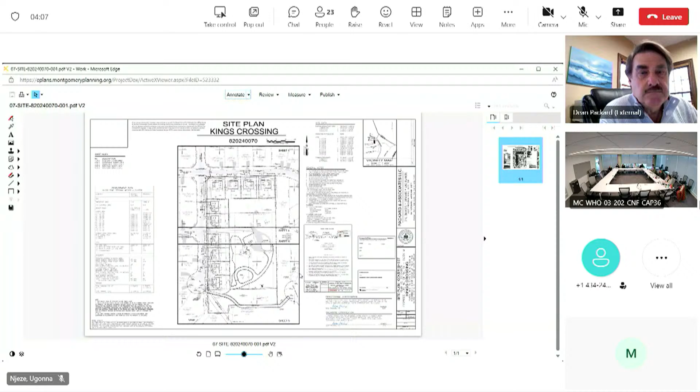So Ugo, if you want to bring up the plan. Morning everybody, my name is Ugo Njeze, I'm the lead reviewer for Kings Crossing. This is a site plan.

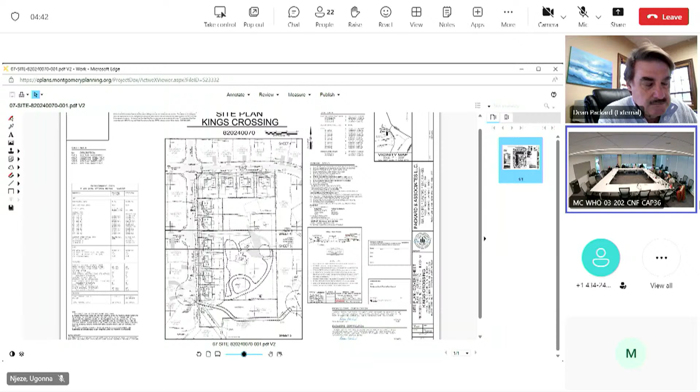There already is an approved preliminary plan for this project. This property is being developed at the R200 optional method development standard. There is a 20% imperviousness cap due to the 1989 Germantown master plan. There will be a Category 1 conservation easement along the rural open space. Between these two cul-de-sacs, there will be a trail developed at the Parks Department standard. This is just north of Kings Crossing Park. The properties around it are zoned PED.

And there will also be reforestation and the removal of 4 trees. So I'm going to start with comments from right-of-way. Well, if you want to highlight any of the major issues, and then we'll turn it over if they have questions.

So one of the first major issues is that there's going to need to be improvements to this intersection here. You need to put in 4 directionals, and that is going to run up against the 20% impervious surface cap. They're already at that limit right there by decimals. So improvements there means that other things will have to be taken away to accommodate for that.

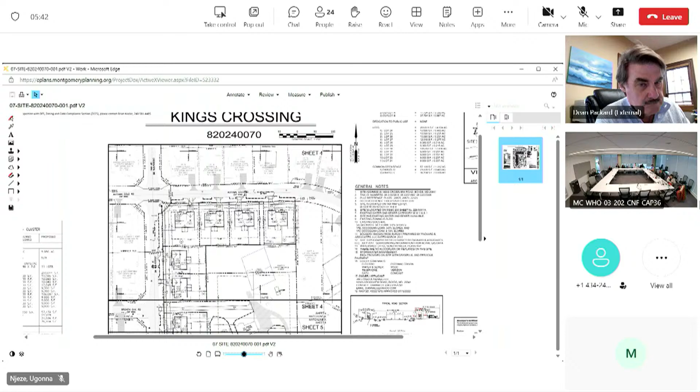Also, Parks has agreed to take over this trail and maintain it, but it's going to have to be to their standards. And we just received the landscape plan, we haven't reviewed it yet, but after the review we can address some of the tree planting details. We also want to work on some of these driveways and push the porches back, push the garage back so the porches are the most prominent part of the homes. Those are our big initial, big ticket comments on this project.

Hey, Dean, okay, regarding the impervious area, if that impervious becomes part of the tract area, even though it's in the right of way, does that still count against the impervious cap, even though it's not part of our property that we have to improve? That is true, yes.

Okay, I have a couple questions. One was for Marie. Her comment about the 50-foot vehicular access to the front door, it's just for one house. So I guess, do we have to show where that comes in, Marie, or can you explain that a little more? I'm not quite sure. So 50 feet to the main side hinge door applies unless you choose to height restrict. If you choose a height restricted unit, you get up to 150 feet. I didn't see that you had identified the height restriction appropriately on the fire department access plan. So if you're willing to go that route, I think that's going to resolve your issue.

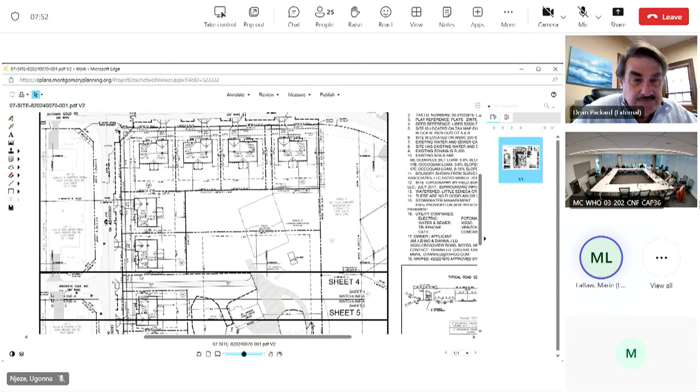Okay, I think the only house that's an issue is the existing house that exists now. I'm sorry, okay, I remember the comment now. So you need to show that your BRLs are all 15 feet, and then it's a non-issue because you don't have a shared driveway. Currently, the fire department access plan you submitted showed your side BRLs at like 5 feet, less than 15. So you have the space. If you increase those to 15-foot BRLs, then you've addressed the comment and it goes away. Okay, all right, thank you.

Absolutely. And is there further definition, because there's a comment about pushing the garages back. Are you thinking of pushing them back 3 feet, or making them flush, or recessing them? What is the logic behind it? I know what the logic is, but what's more specifically being asked? Is Mr. Duke on the line?

Sure, one of the things is that we don't want the garage to be the prominent feature of the facade, rather having a porch or another element be the prominent feature, a covered stoop, the main facade of the building, of each house.

Okay, so it just needs to be addressed and worked out. Right, Dean. That comment also ties in to the comment from Sam Farhadi with DPS right of way. Sam, do you want to elaborate on that comment about the driveways?

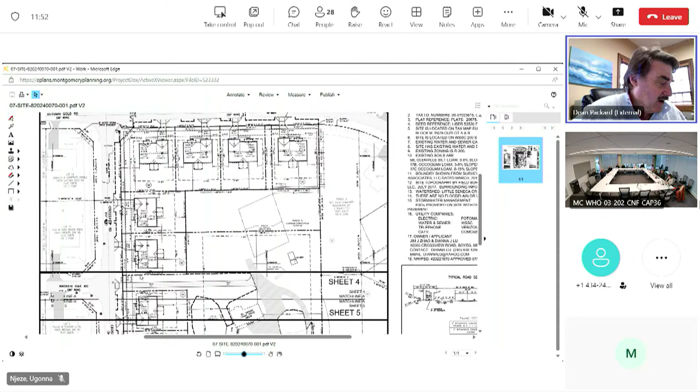Okay, and one other question I have in your comments, I guess change mark RRP-1. It's kind of a long comment about providing public sidewalk. In the last sentence, it says, however, it seems the intention is for it to be maintained by parks. If so, please replace PAE with the appropriate easement accordingly. What does PAE stand for? PAE is what you currently have shown on the plan, Dean. It's called public access easement.

Oh, okay. Public access easement essentially turns it over for maintenance to the county. And if you want to meet county standards, they're a lot more rigorous and strict, and in our preliminary discussion, parks is willing to take over the maintenance. Accordingly, you need to change the easements that parks finds appropriate, and the cross sections and standards need to meet their standards as well.

Okay, and we're not proposing to do any changes to the swales other than putting the driveway culverts in, so we'll have to justify that going forward. Yeah, I mean, since it's open section roadways, swales need to meet our standards: freeboard, slope, velocity, and everything per our manual needs to be checked to make sure they're all compliant.

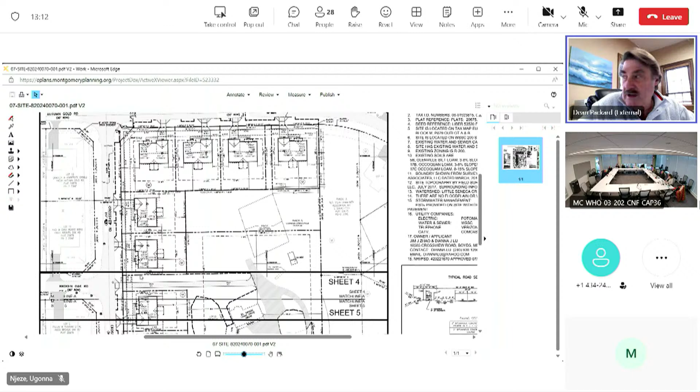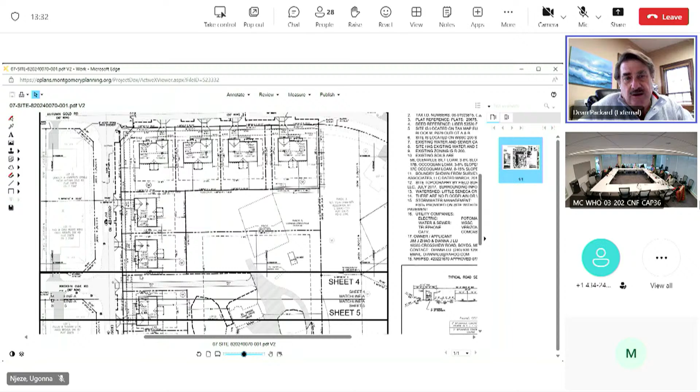Okay, the next discussion, I know we've been going back and forth with WSSC on this. When we first submitted the plan for lot 28 in regard to WSSC, we had a sewer connection between lots 26 and 27 connecting to Autumn Gold Road. We got a comment at one point in time to connect to Crossview Road.

And more recently, the discussions between the applicant and WSSC have been—my understanding is that they would prefer not to extend the sewer in Crossview Road, and they would prefer to have the connection between lots 26 and 27 to avoid additional sewer to be maintained. I don't know where that's going, but if somebody can address that.

This is Matt Snyder with WSSC. So we have no issues with the sewer being extended in Crossview Road. If the applicant wants to apply for a non-abutting connection and use the existing manhole, our concern is maintaining the pipeline design manual setback from the two lots on either side. I can't tell you what lots those are if it was coming from Autumn Gold Road.

So that would be an option, but we need to make sure that the excavation for that sewer in the future for maintenance won't undermine the slabs of those two houses. So it can possibly come in between those two lots, but we also have no issues with the sewer line being extended north up Crossview Road to serve the house and the other lot.

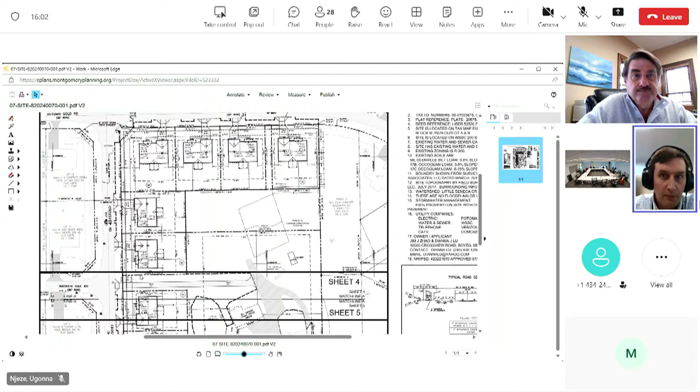So as long as it's not an issue for anybody else, because I guess it would be a private easement, dedicated to WSSC for maintenance. So that would be for private maintenance, for lot 28's maintenance purposes. WSSC's connection will end at the right-of-way line. I'm sorry, I stand corrected.

This is Rebecca from DOT. We had that issue that was brought to our attention regarding WSSC and the water meters, and we haven't heard back from them. WSSC was supposed to provide some information last time we met, and we haven't made any further progress on that.

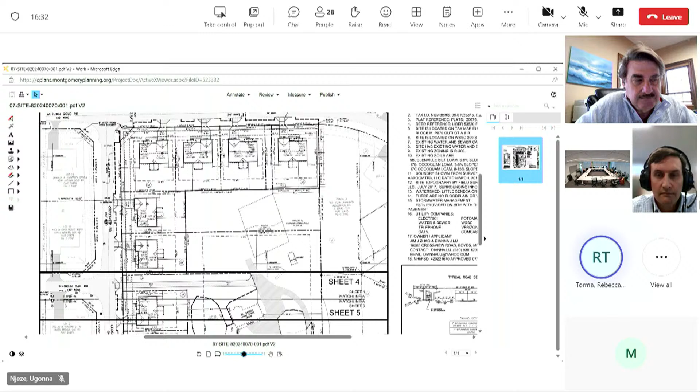This is Karen Carpio, Rebecca. I will talk with Ray Chica, our division manager, about it, and I will give you an update. Not today, tomorrow. I just wanted to bring it, and I want to bring it to Dean's attention. No, absolutely, thank you.

So per the applicant's request, if we were to revise the plan to show the sewer connection between lots 26 and 27 to support the WSSC requirements, would there be any objection to that? I don't think so. We'll have to look at it a little bit more. We can coordinate afterwards.

I know the applicant's on the phone and they were very interested in hearing the discussion on this, so I just want to make sure it was brought up. Well, they're more than welcome to join any conversation we have after the fact.

As far as the open space, I would imagine the open space exhibit would be a part of the landscape plan. And as far as benches and access, I know the logic would be to have benches along the park trail, that would work. How does that necessarily apply to the open space area in, I guess it's parcel E, because we just have that kind of as an open area?

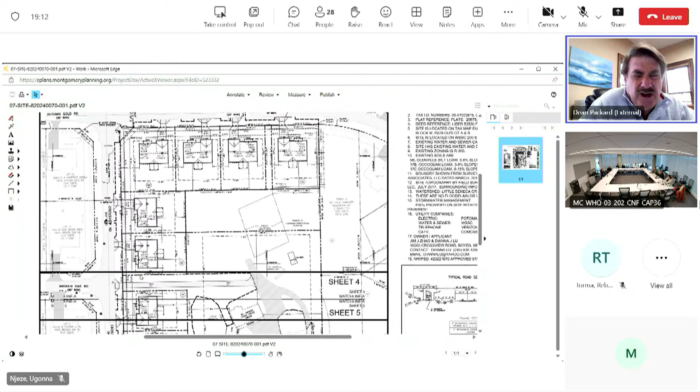And we need to do the, if the park is going to take over the trail, from what I understand, they would take over the trail even across parcel E from one road to the other, and it would have to be built to their standards. That's my understanding.

This is Henry Coppola from Parks. So yes, Parks can take on maintenance of the paved trail as long as it's built to all of our standards, and as Scott alluded to before, with the proper easements for it, we're going to need a separate easement document directly to Parks for access and maintenance, and it'll need to cover all of the area of the trail that's not on parkland.

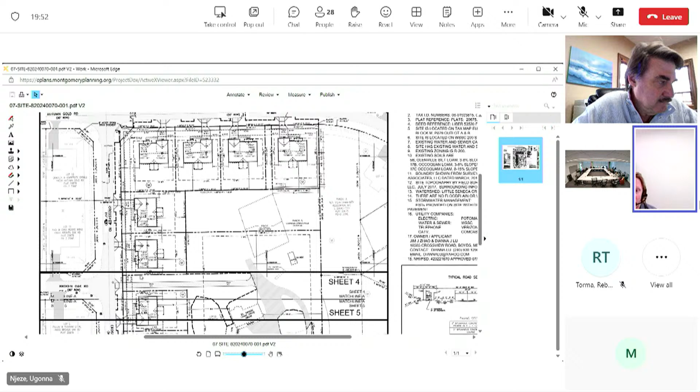So that's across the new proposed HOA parcel from this project, but it also crosses an existing HOA parcel on the plans to reach the cul-de-sac on Crossview. And for Parks to maintain that piece, we'd also need to have an easement providing access for the maintenance and use of the trail across there.

Just FYI, the easement will probably have to be a little bit wider than the actual 11 feet of the path, just a slightly different bit to cover and show on there, because if you've got to do work on it, it's not just directly on the surface. But those are details we can figure out, and we can provide some examples of the kind of easement language we're thinking about.

11 foot is the minimum width, and I know there were some questions from the applicant and the community as to potentially putting bollards in, since they were worried that cars would be driving on it. Yeah, I think we have standards for bollards, and we can certainly look at whether or not that seems appropriate here. If there's concerns, then it's probably reasonable to take a good look at including them.

And there was one last question about extending the sidewalk.

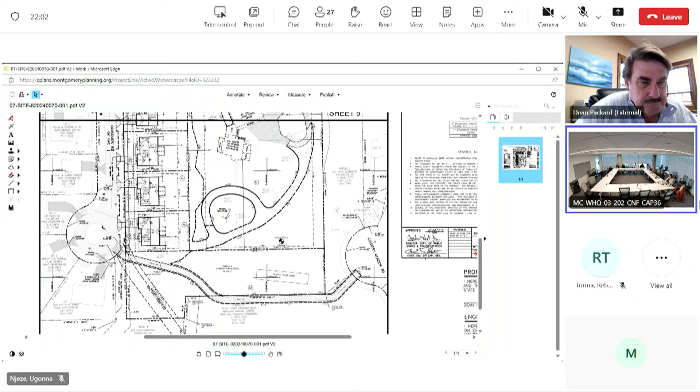Yeah, that's a similar comment as well. Get to this thing, so connect that sidewalk to the one we're proposing. Exactly, yes. Okay, and there may have been a reason why that wasn't done before, but I'll look at that. We can talk about it later.

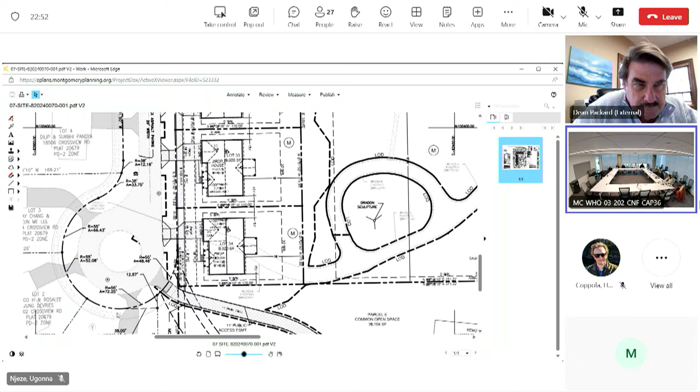I have one more comment as well, Dean. The trail that you're extending on Parks property, when it connects to the street on the cul-de-sac, I'm not sure what's the name of it, is it Cross Country? On the right-hand side, please show the sidewalk and show the connection is made to the sidewalk. Right. Okay. All right, we can do that.

I did have one question for Doug Johnson on the forest conservation plan. I'm here, Dean. I understand the new code, but I was trying to understand how the two worksheets really came into play with this property, since we were doing all the forest conservation on site, because it says something about a worksheet for on site and off site.

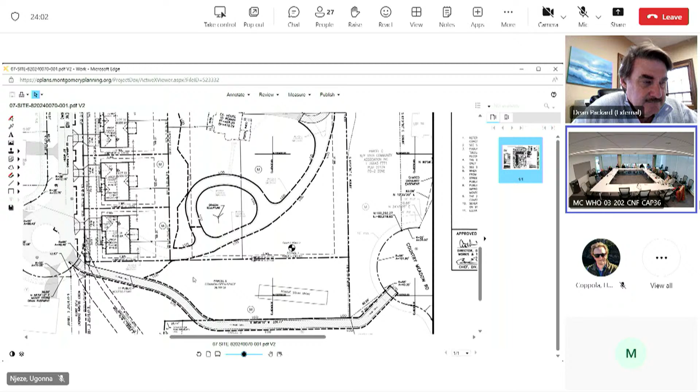Yeah, that was set up under the new law where the requirements are different. If you notice offsite, generally the requirements will increase if you're going outside the watershed or outside of a priority area. Our attorneys want both sheets on the FCP, so they made that a requirement for us. So that's how it got shifted over to you.

Okay, all right. Also, we're talking about all these pushing the homes back, lengthening the driveways, doing offsite improvements. I just want to reiterate that there is a 20% impervious cap on this property, so you may have to get a little creative not to go over that.

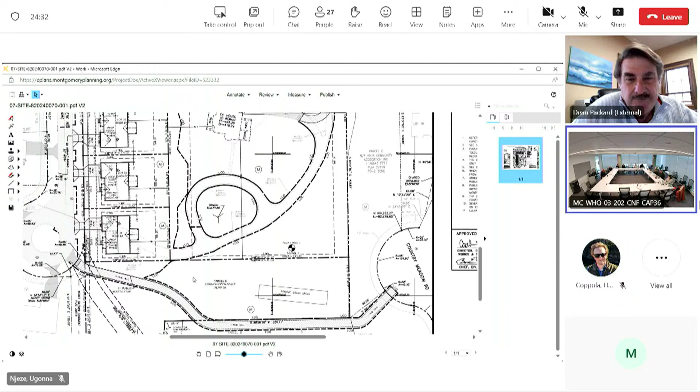I understand. And Doug, just before you walked in, the question came up on whether the off-site impervious areas counted against the imperviousness of the project. Yes, and the answer is yes. Any offsite work an applicant is required to do gets counted into the net tract area, the FCP, but also if it's impervious in an impervious capped area, then it's counted against the project as well.

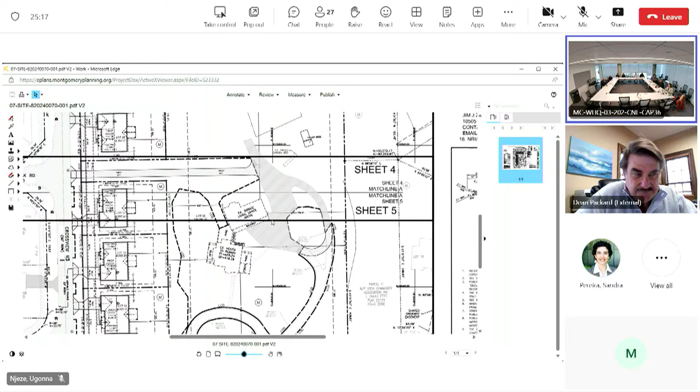Okay, we'll juggle and balance. I think that's all that I have. Thank you, everybody. All right, thank you.

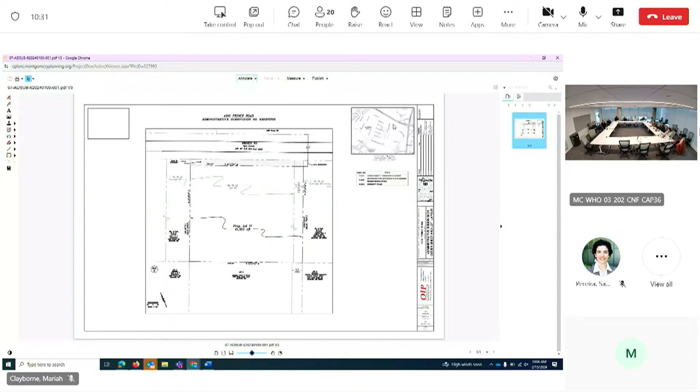So this property, as Christina stated, is located at 4310 Prince Road for an administrative subdivision plan. The owner proposes to take part 14 and part 15 of the lot to create lot 17, equivalent to 41,360 square feet. They will be adding a single family residence to the site, but also keeping the existing pool on the property as well.

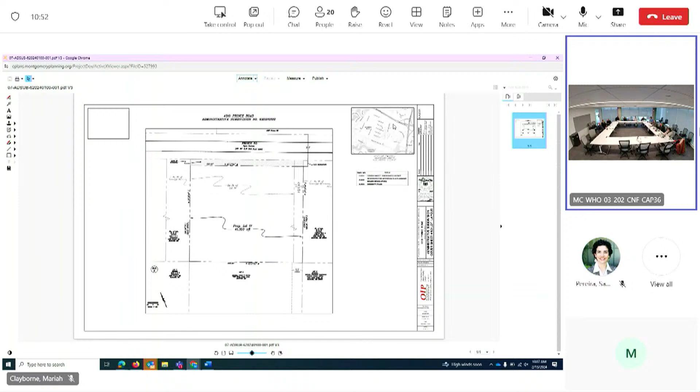The main concerns for this site, as previously, the applicant did meet with staff before to go over a concept plan for this proposal. And the major concerns were definitely to provide history of the past lot lines, because things were just a little unclear. That still hasn't been provided yet. So that definitely is one of the major concerns, to provide past history of the lot lines and the deeds for this property and location.

I can go. Let me show the plan just so you can see.

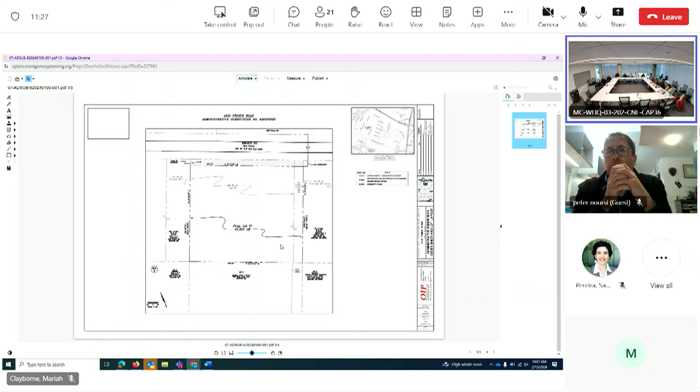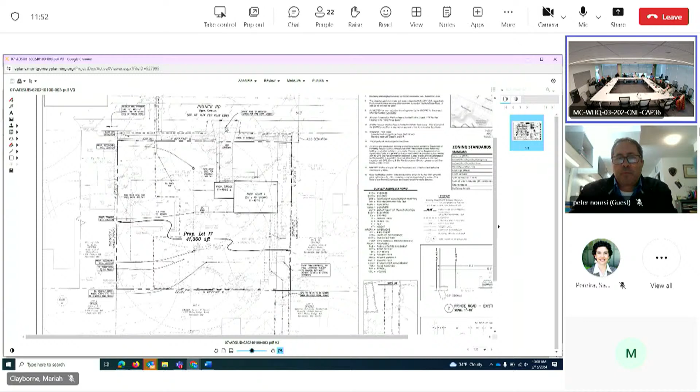Zoom out a little bit. So of course, this is the house that's proposed. There's a driveway that is proposed as well. I do know that our design staff has comments for this as well, but I'll go ahead and kick it over to the applicant for any questions that you may have with the comments that were provided.

Peter, I assume you're going to take the lead on this? You're muted. I got that. Thank you, Mariah, and thanks for the opportunity to present this plan to you all. Lance, can you turn it down?

We went through the comments and we're comfortable with most of the comments. We do have a proposed change that we would like to present to you for your consideration and hopefully acceptance. But just some background on this, or not background, but some of the comments.

There were quite a few comments which questioned the fire and rescue requirements for the driveway. We confirmed with Marie LeBeau that that's the driveway that's required in order for the fire department turnaround at this site, because to the right of the plan there's two more lots and there's a dead end without a turnaround that's acceptable to fire and rescue. So that's what's necessitated the driveway configuration.

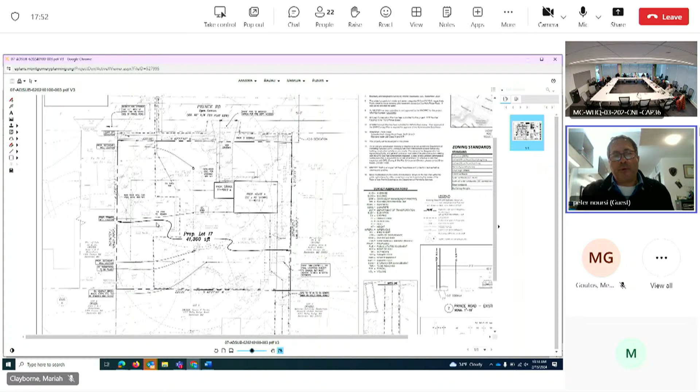Those were our main items that we wanted to flag. We didn't have any significant issues with any of the comments. The only one that came up was when Mariah's comment that, before we go to record plat, we would have to remove any structures that contradict or conflict with the setbacks. So we have no problem with the existing shed that's in the front setback, but the swimming pool would also be in that, and again, we want to save that swimming pool in its current layout.

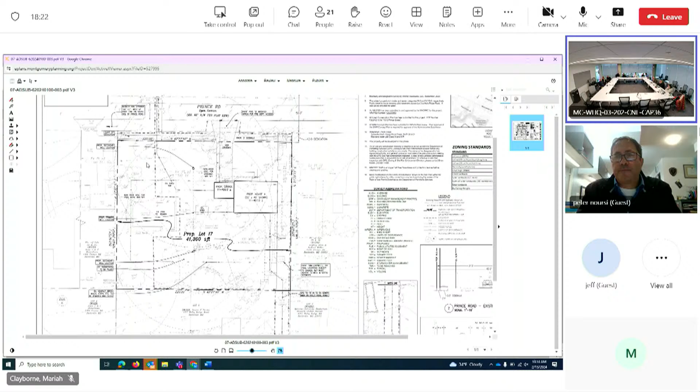Okay, so we'll have to look at that during your resubmittal to review. Okay, so our general policy is where dedication is possible, to get dedication. Given the circumstances, we'll consider an option for an easement instead, but at this point we can't say yes or no. We need to discuss it further.

Okay, yeah, I mean it's an existing swimming pool that has been in that neighborhood for decades, so again we would like to save that if possible. Understood, so are you seeking a variance from that setback, or what are you requesting? We're requesting that instead of providing dedication, it be made into an easement that would serve the same purposes, but being an easement, the setback would be to the existing property line, which is 12 feet.

Which gives us 12 feet for the setback. And the edge of the swimming pool right now that protrudes towards the street is at 78 feet from the proposed property line. It is 90 feet from the existing property line, and the whole neighborhood has that existing property line. So Peter, can you address the neighbors? The neighbors do not have the dedication, is that correct?

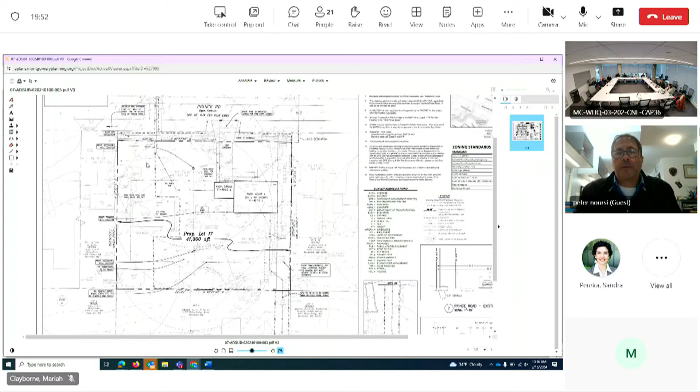Correct. The whole neighborhood, when the subdivision was made, all the streets there had a right of way of 50 feet. However, as we're required to go to subdivision for this situation, typically we have to meet the current standards for the road cross section.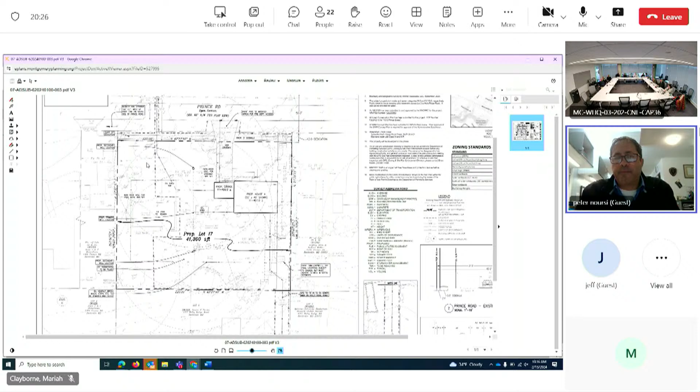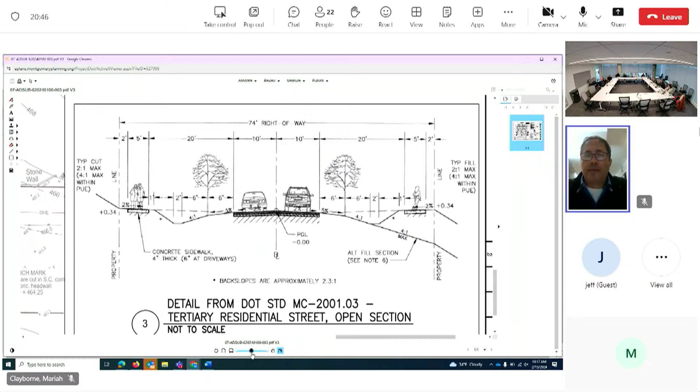And the one we're proposing, Mariah, can you show the cross section we're proposing? It's on the bottom right of the sheet. It's the 2001 Montgomery County DOT standard 2001.03, with a width of 74 feet. So from the center line it's 37 feet, and the existing right-of-way width from the center line is 25 feet. That's where you get the extra 12 feet.

We initially, the plan we're looking at, we're going to do dedication. We hadn't considered the pool setback that we want to keep. So that's why we were going to resubmit the plan with all the comments addressed as best we can, but with this one change where we will request that dedication be made as an easement and not as outright dedication.

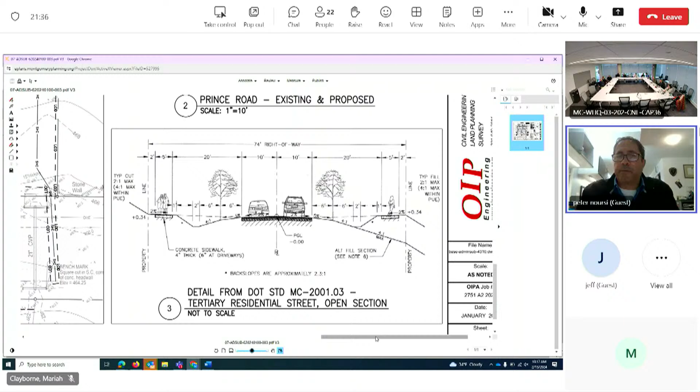And the setback you're referring to is the 80-foot accessory structure setback? Correct, that's how we interpreted the swimming pool. So really we're not talking about 12 feet, we're talking about 2 feet. Correct, it's 2 feet. It's right now, I think 78.1 feet was the setback, right around 78 feet, plus or minus.

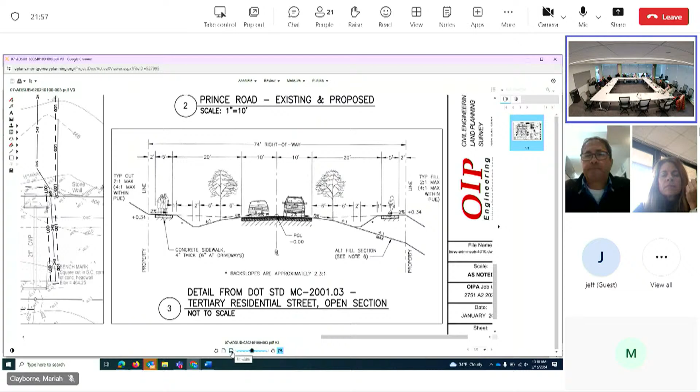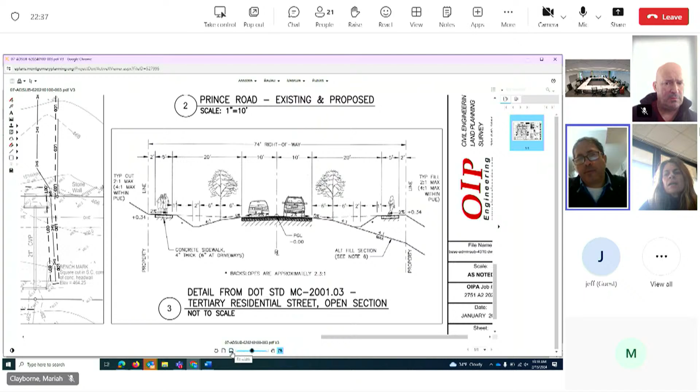So are you asking us, and DOT for that matter, to allow an easement for all 12 feet or just the 10 feet that would not affect the setbacks of the pool? Either way works for us. I was thinking it would all be an easement just for simplicity, to make it one item, but we'd be open to considering breaking that up to 10 feet as opposed to 12 feet, as long as we meet that setback requirement for the swimming pool.

So a couple of things. The cross section that you show is no longer valid. We don't do tertiary streets, it's based on complete streets, and complete streets does not discuss open section. So you'll have to create your own cross section and show us without the tertiary roadway. From the edge of pavement is where you would use the cross section, and we need to make sure it fits within.

So you're showing a right of way, and this is what you're proposing, 50 feet of right of way. And so you're saying that dedication area, you're not dedicating anymore? That's what we were requesting, that change in order for the swimming pool to meet the setback requirements. Because right now, if we did give the full 12 feet dedication, that bump out part of the swimming pool would no longer meet that 80 feet setback requirement for accessory structures.

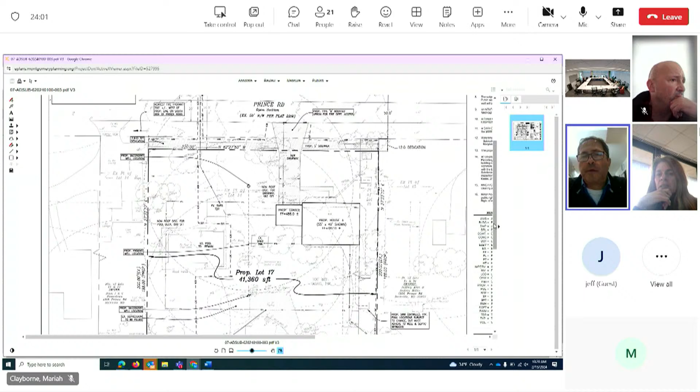So why can't they just get a waiver for the setback, since it's an existing thing they have to dedicate? I mean, we're trying to do the most straightforward approach. Right, I understand that, but we have to get... Can DPS comment on that? Maybe if somebody's on the call from DPS, can they comment on that waiver option?

Well, I think this is a question we should circle back on, because I would like to explore the possibility of a variance. I hear everything staff's saying, Peter, is we very much want the dedication. I hear what you're saying. So let's table this as a question we need to circle back with. I think we need to coordinate with DPS, some zoning exploration as well, to see what the best avenue forward is, so maybe we both get what we want.

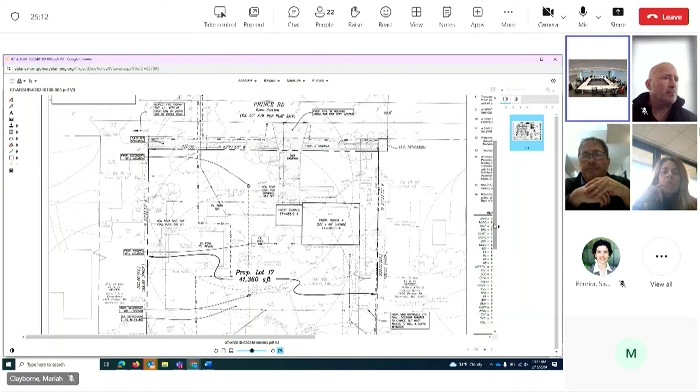Yeah, the idea for us is to address it right now in the administrative subdivision and when we do the record plat, so we don't have to go back after that's done and request a variance, which would be time consuming and costly for our client. Well, I don't want to promise we won't do that, but if we can fold it into this approval and process somehow, let's circle back on this. I understand what you're saying. Yeah, and then I guess I had a question on complete streets.

So, yeah, that was a comment that came up about that cross section, the 2001.03, the DOT cross section. Yeah, this is Billy Whalen. That was my comment, and I emailed you.

Yep, that's an old standard, so we want that reference to that standard removed, and then you'll have to fit that open section cross section with the dimensions with the sidewalk. It would be similar to what you show now, but with changing the sidewalk from 5 feet to 6 feet, it shrinks — there's a 20-foot section between the pavement and the sidewalk, so you would have to adjust that so the ditch still fits within that space shown on the cross section. But we don't want any reference to the old standard cross section.

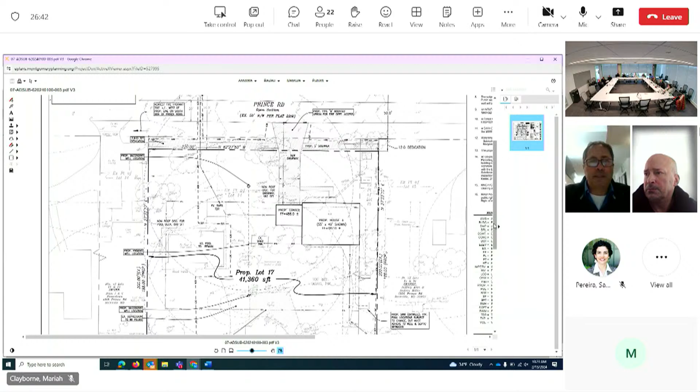Okay, yeah, I'm sorry, earlier I was searching for complete streets — I had a senior moment with that term — but we looked through the updated guidelines on it, and we didn't notice that there was a fixed cross section, which I guess you're saying, I'm hearing again on that.

The one thing I heard, though, Billy, you just said you want 20 feet from edge of pavement to the sidewalk. No — the cross section shown has a 20-foot segment between the edge of pavement and the sidewalk, but bumping the sidewalk up to 6 feet reduces that 20 feet to 19 feet. So you would have to adjust the dimensions within that 20 feet. If you go to the cross section, I can show where.

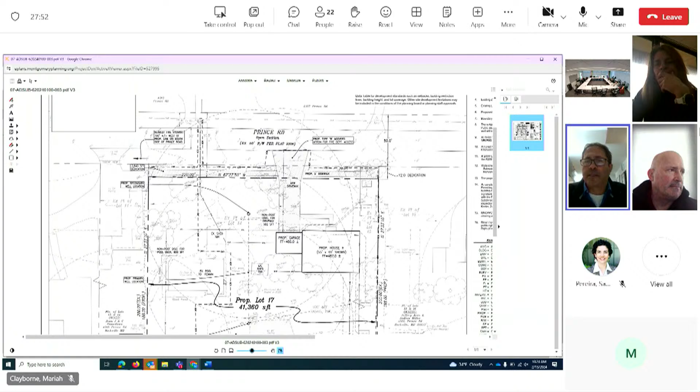Yeah, I mean, if we're going to create our own cross section, can we make it a 70-foot right of way that would satisfy the other requirement or constraint we're dealing with, or does it still have to be a 74-foot right of way? Anything reducing the right of way needs a written justification for why you're doing it, and then we need to approve it.

So my only thought on that is the right-of-way width of 74 feet is based on that DOT standard, which no longer — no, but see, we have complete streets. Complete streets, unfortunately, doesn't really address open section roadways. So the right-of-way, the pavement section, and the stuff between curbs is fine, and then you use the old tertiary standards or some kind of standard.

Was this a tertiary roadway before? It is secondary residential — it's a secondary roadway standard. So you're going to use secondary roadway open section, and use that as your starting point for the behind-the-curb part, from the edge of pavement. And then any reduction from that, you will need to get a waiver from DOT.

Can I ask — again, one of the things I mentioned in my opening remarks is if you were to go to Google Street View and look at the streets in that whole subdivision, they're all consistent, it's 20 foot of asphalt, there are no sidewalks. Doesn't mean we won't put in a sidewalk, but can we try our best to match what's out there, or is that not possible?

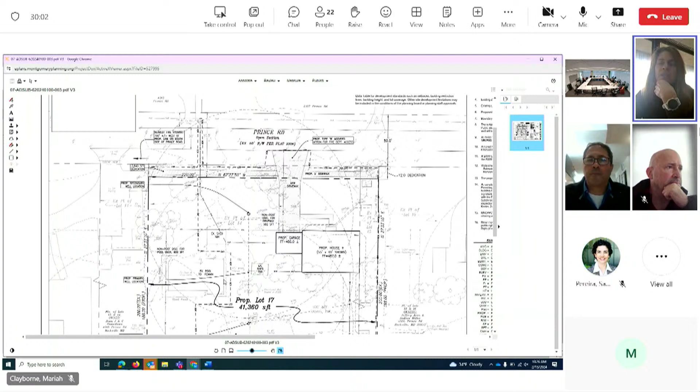Okay, we'll try to get some of that to you hopefully later on this week. Yeah, then we need to talk to DPS, I guess, about their setback.

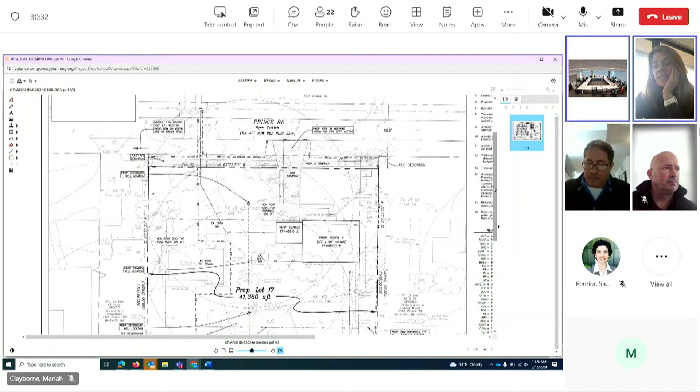And Rebecca, I'm just trying to make sure not to throw a wrench in here — you're talking about the cross sections and how they work, like the right-of-way width being the planning board's decision, I'm making sure that... Yeah, no, so we do cross sections — we do whatever right of way you give us, and then we try to fit the cross section in. I mean, the swale has to be in the right of way. Yeah, so I'm just doing a small clarification, just making sure we're saying the same thing.

So if we do a profile that generally meets the existing profile along the whole street and fit a 6-foot sidewalk in that, is that kind of workable? We have a lot of infill developments that come in, and at a minimum we request the right-of-way. So while we might not get the sidewalk, we actually get the right-of-way in case of future redevelopment, because we do see a lot of redevelopment in areas.

I'm not sure exactly where this is, but we see a lot of redevelopment, so we want to make sure we don't prohibit getting the right-of-way. We can't take an easement if there's no facility in there. When we get dedication, we can take the dedication, but we can't take an easement that has no sidewalk in it.

So we will consider it, send us your proposal and written justification why. There is code language for reduction of road right-of-way, but I'm not sure that a pool counts as that, so I'm not sure exactly how that fits in. But in the code, chapter 50, there is a reduced right-of-way discussion in there.

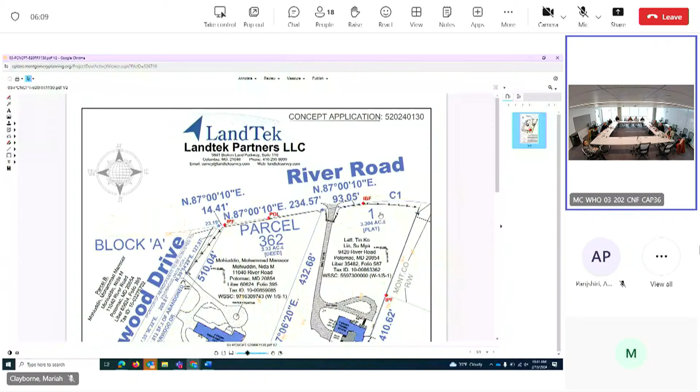Morning. Okay, so currently we're looking at 11030 River Road. This is our R2 zone. Currently, the owner of lot 1 is proposing to purchase 0.7 acres of the parcel next to the neighboring parcel to create a 2-acre lot in the rear of their lot. So altogether, the proposed acreage being proposed is 2 acres.

And of course, the main concerns right now will be transportation, that there is a section in the master plan that shows along the S curve. Let me pull it up, please. Currently, right here along River Road, there is a proposed dedication from the State Highway Administration along the frontage of the property. I know transportation could touch more on that if you have any questions.

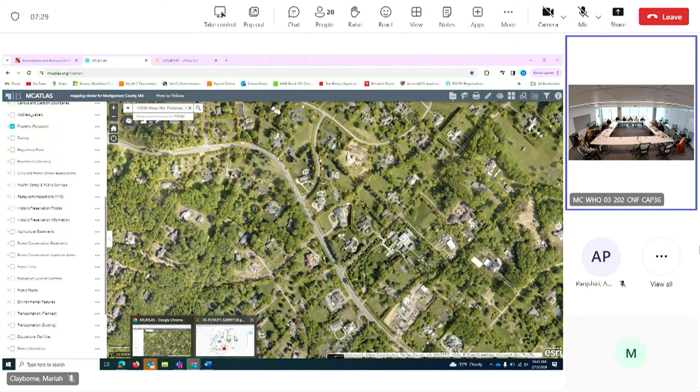But then also at the rear of the property, shown on your plan, there is a runoff area, but also within our system there is a blue line stream that goes towards the back. So that's a major environmental issue right now, in order to determine if that is an actual stream, or if it's just showing up in our system as a blue line stream. So I'll leave it to you if you have any questions.

Basically, the concept as you've outlined is exactly what the owner would like to do, which is to purchase 0.7 acres, combine it with approximately 1.3 acres of her existing property to create a new lot of 2 acres for future build. The goal of this conceptual plan was just to get a feasibility idea of whether this is even feasible. I think the comments we got flushed out are right on with what we were trying to get out. So now the question is, of those comments, which ones do we really need to focus on to decide whether or not it's feasible? I think the 3 you probably hit on are the exact same ones I flagged.

So from an environmental standpoint, looks like we would need the NRI FSD, the Forest Conservation Plan. That would be pretty much a hard requirement to get to that next stage. So I've noted that.

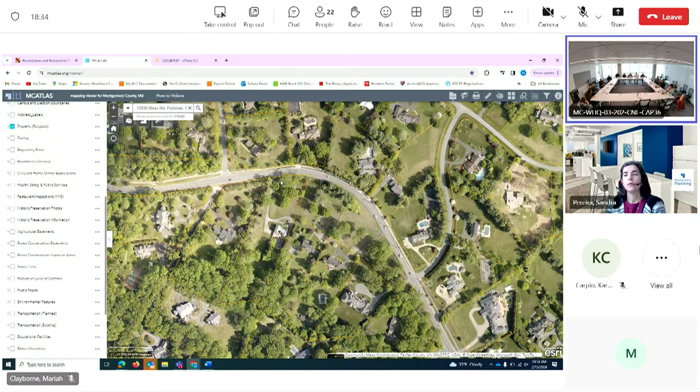Okay, and then I know there's some other comments here about sidewalks and bike paths and other things that might be considered, impact related, including on the side road there, which I think is Riverwood Drive.

So I could defer that to transportation to touch on that. You want to know specifically about Riverwood? Yeah, well Riverwood in general, and also for both River Road and Riverwood, there's talk about additional easement areas - one public utility easement was mentioned in the report. And I think also there are bike paths and buffer areas and so forth.

Yeah, I think that was probably the recommendation, but do you want him to state what it is? Well, would that be a requirement falling out of this plan? In other words, is that something that would be required by the owner to implement, or have impact fees to implement? Or how does that get handled? Yeah, so was there a bike path that was recommended along River Road? We made several comments. I know that the bikeable shoulders can be waived through a fee.

For Riverwood specifically, I know that's a private road. Our code defers private roads to the complete street guidelines, so we won't need you to address road improvements in any way on that road specifically.

Which side, the Riverwood side or the river road? It's actually both in the report. There's talk of both. But the bike road is already across the street, already on the River Road. There's another bike road across the street, yes, but on the River Road.

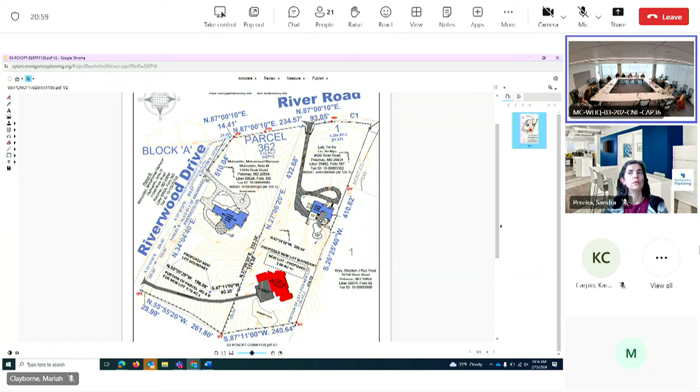All right, I think those were the three main areas that really had major impact. There's a lot of other comments that would obviously be addressed as part of the development plan, but as far as go, no-go items, those are probably the key ones.

Okay, I don't know if we've got any other questions. We're probably close on our time anyways. I think those were the big items. Do you have any questions, Sue?

They have to wait for the state highway, right? Yeah, state highway would be a big one. So next steps on the state highway, is that something we need to do, or something done in this process? As stated, we're actively trying to get in touch with them. Moving forward, it would be great to go ahead and get started on the NRI process to see if that actual stream is there, and what requirements would be for environmental use for the back of that property or for that proposed lot.

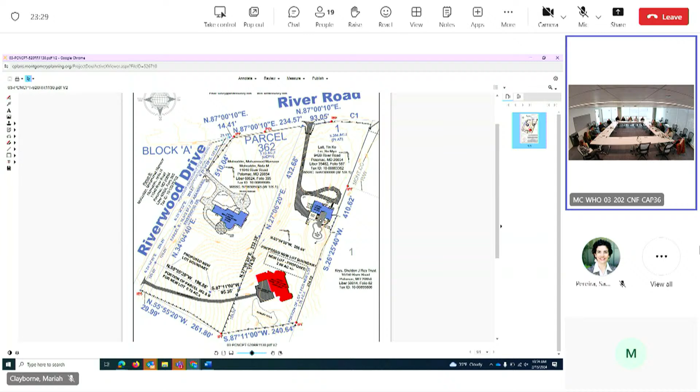I'm just going to say one thing. There was a lot of information there, a lot of comments, but I think the two big picture items are: one, what is the environmental setting in the southern end of this lot? And two, we'll have to have a conversation with SHA and ourselves internally to make sure that dedication in front is still an active project we're pursuing to straighten that road, et cetera. So those are really the two most important items.

Right, and I saw along with the environmental conservation, the conservation plan, that there might be a forest conservation area there that needs to be contiguous. Well, the master plan for this area is calling out retention of forest. But the forest conservation plan itself will follow on the heels of the NRI FSD. So you need the NRI first, even to make the subdivision application, but the FCP, the forest conservation plan, will come in with that application after the NRI is approved. Got it, okay good, all right, very good.

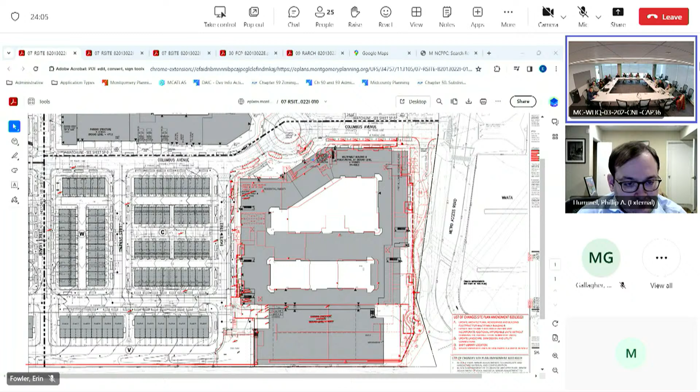And that's a good segue into the other comment about increasing the green between our building up to our property line. We are creating a really nice linear park, heavily landscaped area. Anything that goes onto the WMATA property, that's outside of property we control, so we won't be touching that, but I think what we'll be creating with the lush trees - we can talk about what those trees want to be and where they want to be.

On a similar note with the loading dock piece, we noticed there's a new trash room over on the corner, and there was a comment about not seeing a loading access over there. Is that - yeah, we only have trash access for trucks adjacent to the loading, so management would move the trash from that remote location. The reason it's over there is because there's a lower level we wanted to service for those units also, and it's a chute that works all the way up and down the building, but the trash trucks won't drive to that side anymore because there's no road on that side anymore.

Manually, the trash will be moved to the garage - it'll be staged to the garage side next to the loading, for pickup. Thank you for clarifying it, we were confused why there's two trash.

Question - I guess back to the landscaping to the property line, what's the transition between the landscaping and the WMATA side before you get to curb? Because the WMATA side is not basically maintained, it's like downhill. Right, right, so the park as it's designed right now meets up to the grades at the property line. It's a little hard to see here, but there are areas where we do sort of boulder retaining walls in order to meet the grade that's there.